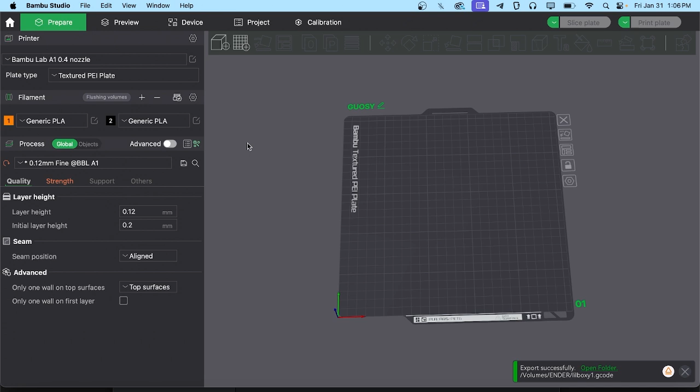Today I'm going to teach you how to prepare your 3D printing model using Bambu Studio. It's really easy actually, even though the interface may look intimidating. All you need to pay attention to is just two tabs: prepare and preview. The whole process is probably going to take less than 2 minutes.

First, you're just going to pop your STP file right into the window. You can drag and drop it. But before we do that, make sure your file is in .stp or .step format, which gives you more precision in how it's printed. Drag and drop it into the window, and this will just appear, usually like this, so you don't really have to worry about it.

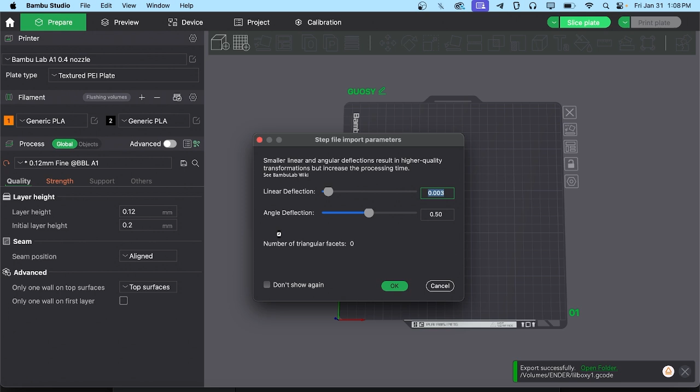I'll just click OK. I like to make sure this piece is centered in case it gets moved by accident. Click on it, you'll see a white bounding box, right click it, and center it. If you have more than one object, use Ctrl A or Command A to select them all. It works either way if you only have one.

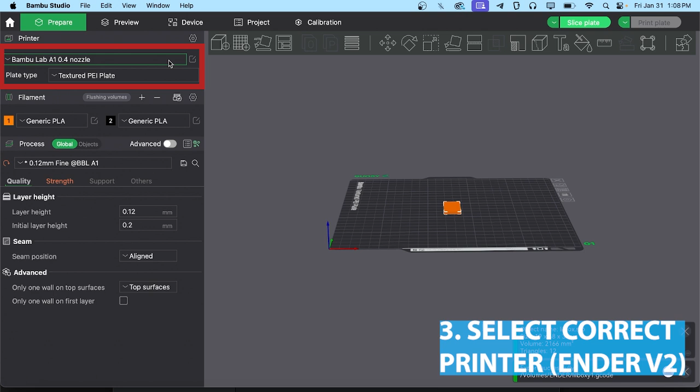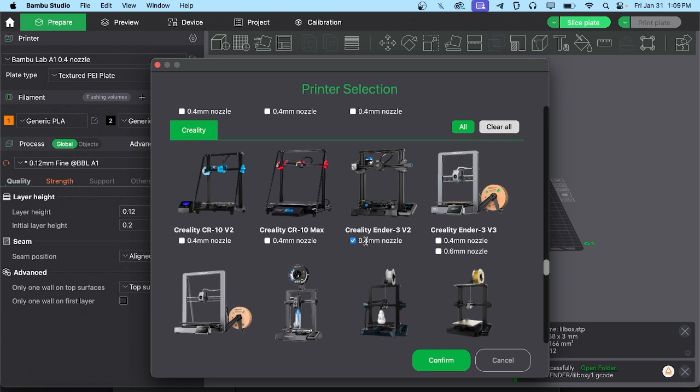The next thing you need to do is select your printer. When you're new to Bambu Lab, there will be a lot of printers listed, but not the one you have, which is the Ender 3 version 2 with a 0.4 nozzle. You just need to go to Select, Remove Printers, scroll down to Creality, which is the brand of your printer, and select the Ender 3 V2. It has a 0.4mm nozzle, which is brass.

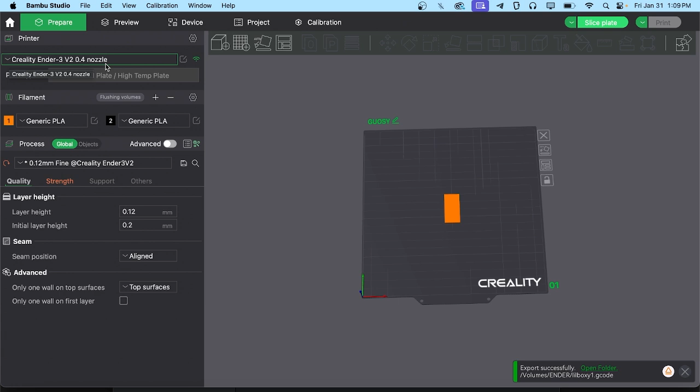Make sure you have it selected, and when you confirm it, remember to select it under the printer section. Click use modified value, and you'll see the printing plate change to fit the Creality Ender. This is important because if your object is oversized, it may print outside the bounds, which will be a problem. So make sure your printer is correct, Creality Ender 3 version 2, and that your object fits within the printing plate.

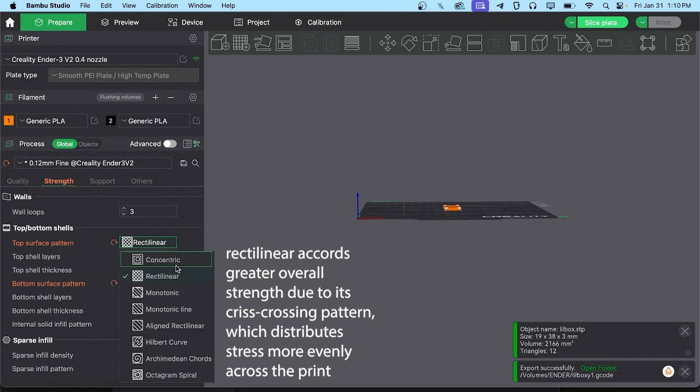Before we slice the object, there are two things I'd like you to pay attention to: the strength printing infill and the size. First, the strength. I like to make sure the surface pattern is printed as rectilinear, because it allows for greater structural integrity. When I printed it as concentric, I had a lot of issues with stringing, because concentric mostly prints from the outside in. So I prefer rectilinear.

For sparse infill density, values between 15 to 40 are recommended. The larger your object, the higher the recommended infill. As for wall loops, 4 is recommended, but since I'm printing something quick, I'll settle with 3. That's the strength settings covered.

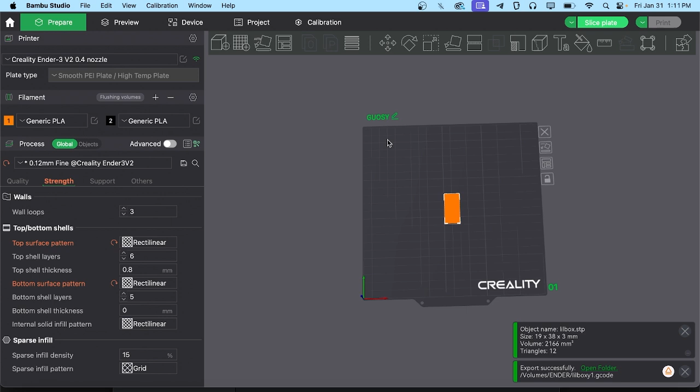Now about size. The size scale is the box with an arrow icon, so you click on it. You just have to double check whether this is the correct scale. It will be millimeters by default.

When I'm ready, I'm just going to slice the plate. Slicing allows you to preview the layers in which the 3D printer is going to print. In some cases, where you print objects with an overhang, it will generate a support, so sometimes you can check on that as well, to see how it's going to be laid on.

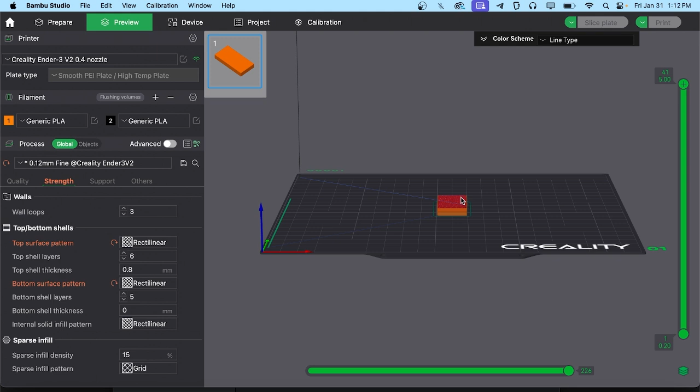And that's actually all. Now I'm just going to export it to G-code, which is the code the Ender printer will read. If it's not in G-code, the printer won't be able to read it. So I'll click export, make sure it's chosen as the Ender exportable drive, rename it, and that's about it. I think this is ready to print.